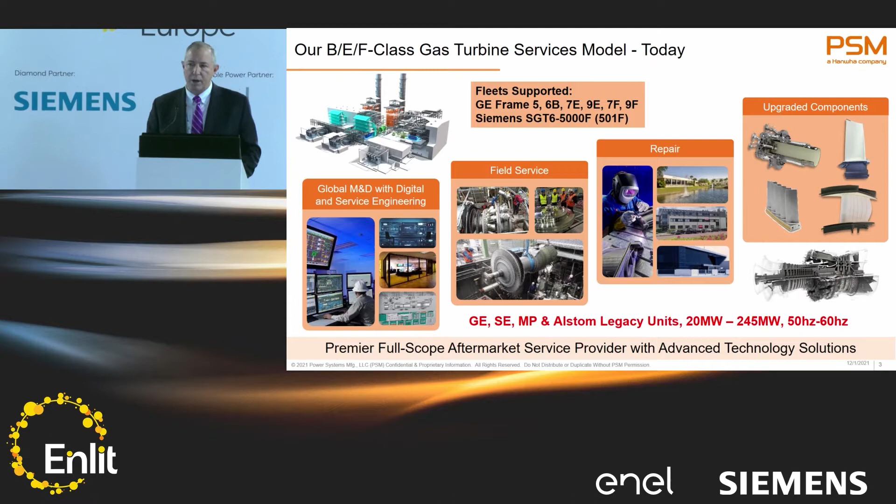In terms of footprint, I wanted to mention that we have 2 technology competence centers. One is in Jupiter, Florida, where PSM is located. The other is in Rheden, Netherlands, where our sister company Thomassen is currently operating. We share the same common R&D, the same technology and product solution DNA, just executed out of different organizations throughout the world.

Now, Torsten brought this up a little bit relative to the hydrogen supply chain. And I will tell you this, I do not view the barrier being in the gas turbine. It's simply a matter of time before we're able to get to a 100% hydrogen dry retrofit solution for installed base gas turbines. The issue is clearly on the upstream.

I think we've got a good handle on the renewable side, from a green hydrogen standpoint, the renewable aspects, that's coming along very nicely. But certainly when it comes to the amount of hydrogen one needs to make an impactful reduction in CO2, the challenge is somewhere in the middle. That is the cost and scale and installation capacity for things such as electrolyzers, even steam methane reformation if one is talking about carbon capture and sequestration, and then storage. Storage can be liquefied, it can be compressed, it can be geologic storage under compression, all of which will be able to support the decarbonization of gas turbines.

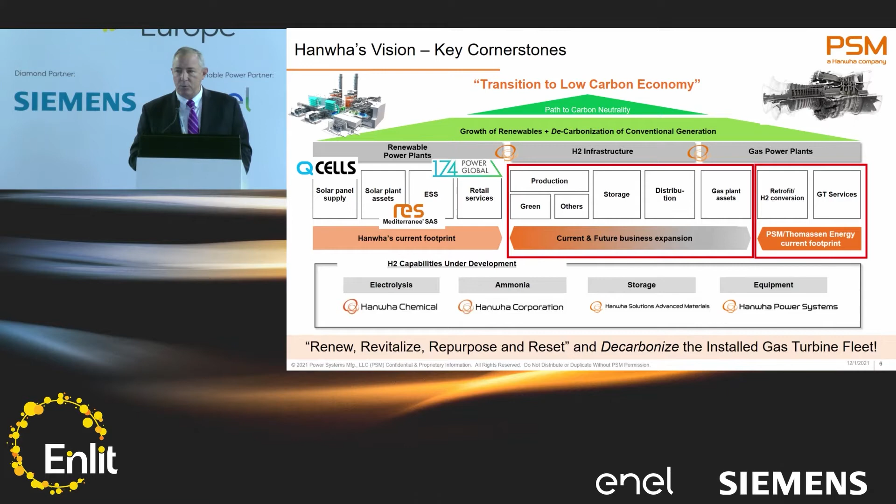So we try to make it as simple as possible for the power plant operator, who may not recognize how challenging it is or where they're going to get the hydrogen, but make it as simple as possible to just bring it to the power plant yard, and then we handle it from there and commission the system from there.

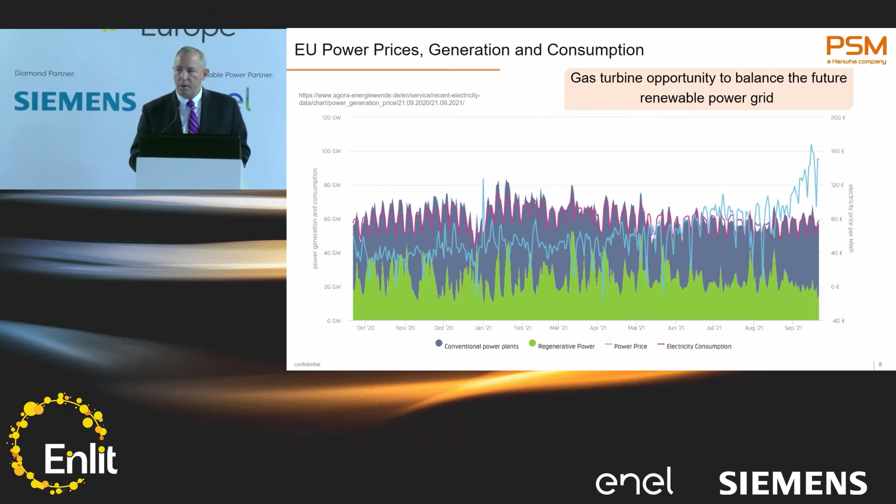Not just natural gas, but now with hydrogen, because the mechanisms for subsidies and also premium for carbon sequestration or carbon reduction will be there. So the business case is beginning to form. It's providing some solidity to those of you who are looking to make decisions within the next few years.

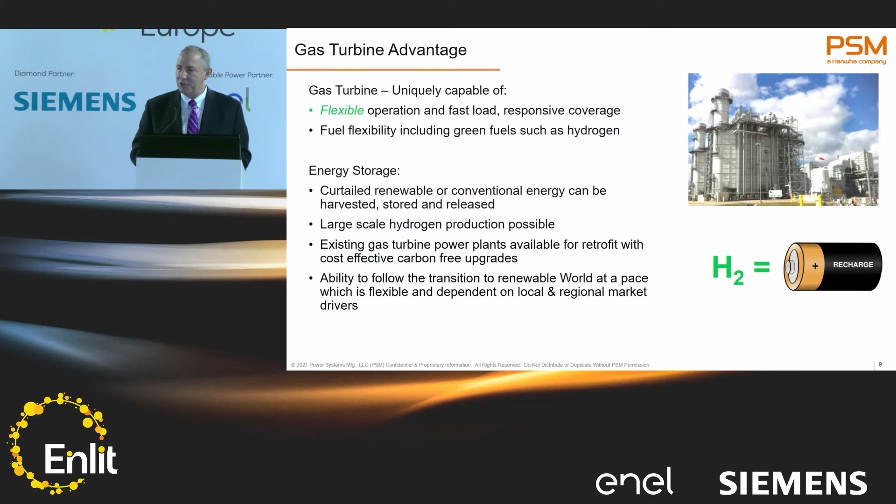So the gas turbine becomes just a tremendous, flexible, responsive device, and hydrogen becomes a measure of energy storage to be released into the power grid for those gas turbines to use. Very important when the wind stops blowing and it's very cloudy days. I think we've had issues where the wind stopped in the North Sea for a few days and the power prices began to spike.

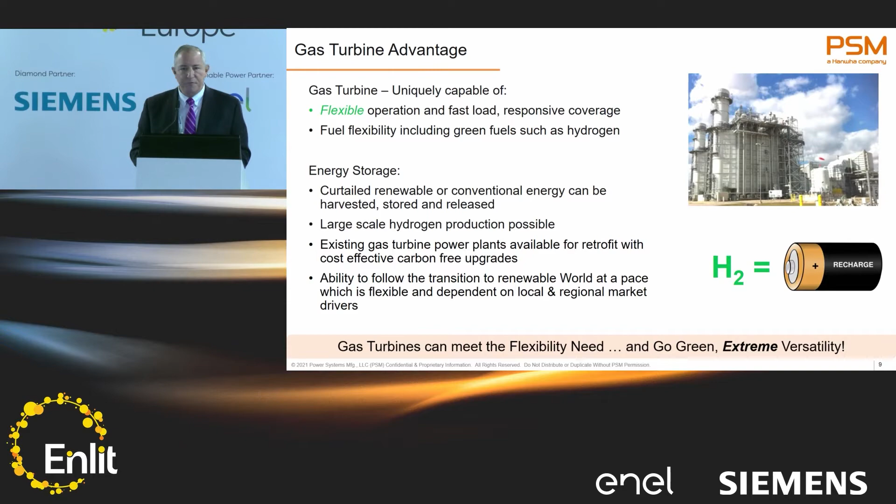Well, just now imagine you're in a situation where you don't have to worry about that. Just use the existing gas turbines. You'll get paid for decarbonizing, and it will be a useful asset for as long as you need it, whether it's 5 years, 10 years, or 20 years. You all have different timelines between either buying new equipment or retiring it. Well, a retrofit solution gives you that flexibility to meet your business case.

Now, one of our core competencies is combustion retrofits. We've been doing it for over 20 years now. We've been doing it on B and E class, let's call them relatively mature gas turbines, as well as F class, which I would argue today, since they've been out there for almost 30 years or so, they're also mature. But we've installed over 100 retrofits.

And this isn't just a replace in kind from an OEM solution. It can be an old diffusion combustion technology where not only are we replacing the combustors, but we're implementing a new control system, the fuel skid, fuel delivery piping. It can be casings, it can be spark plugs, flame detectors. The entire scope is something that we do, and we have two platforms.

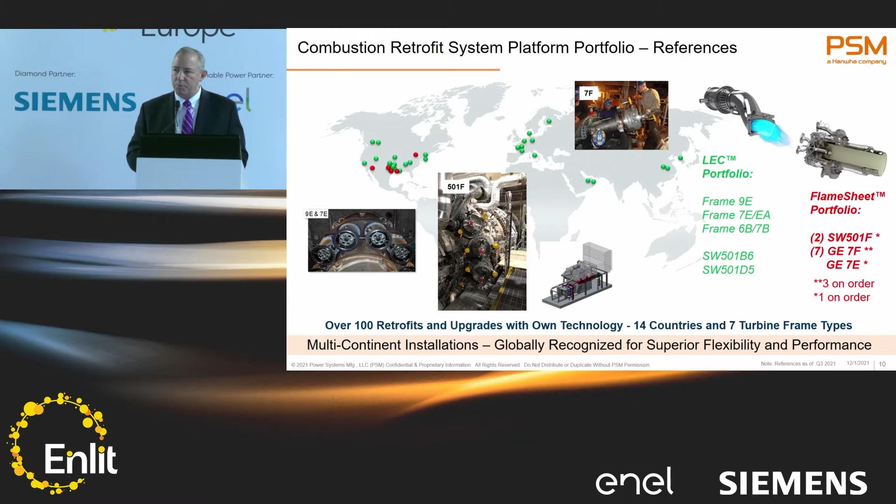One's called the LEC platform, which is more for the smaller, let's call it below 120 megawatt solutions. And then we have our FlameSheet technology, which I'll introduce to you today, which is our universal platform for all can-annular combustion gas turbines that are out there today. One platform, geometrically scalable, up to 100% hydrogen, but maintaining all of the characteristics you require in your gas turbine, such as flexibility, turn down, very low emissions, because it has the ability to consume anywhere between 100% natural gas and 100% hydrogen. Now I wanted to just speak to an example

of an existing retrofitted plant today with our technology. This is in the Netherlands. And one of the first, and say, quick hit successes is with refinery off-gas. Typically that's going to be with a high amount of hydrogen. Well, that's the case here.

This is a 3x9E cogen power plant that's not only supplying power to the grid, but right next door, this is in Terneuzen, Netherlands, is a chemical plant which requires the steam from this cogeneration plant for chemical processing. In turn, they're giving hydrogen back to the gas turbine to offset fuel costs.

They're owned by the same chemical plant, or chemical company, and also decarbonizing the gas turbine at the same time. The scope, again, is relatively straightforward. The modification to the fuel skid, the fire protections, explosion controls, the leak detection, the ventilation, very straightforward, well-known implementation of this technology.

A slight adaptation to the control system with a product we call Combustion Auto Tune, which will be able to instantaneously tell the variation between hydrogen and natural gas in your fuel stream.

So don't think of it as what is currently being used, gas chromatographs, which are relatively slow. We want you to have any sort of instantaneous change in your hydrogen fuel delivery from 0 up to the amount that the combustion would be able to take, and be able to modulate the fuel splits in that combustor to allow you to operate safely, maintain your emissions, and keep the combustion pulsations under control.

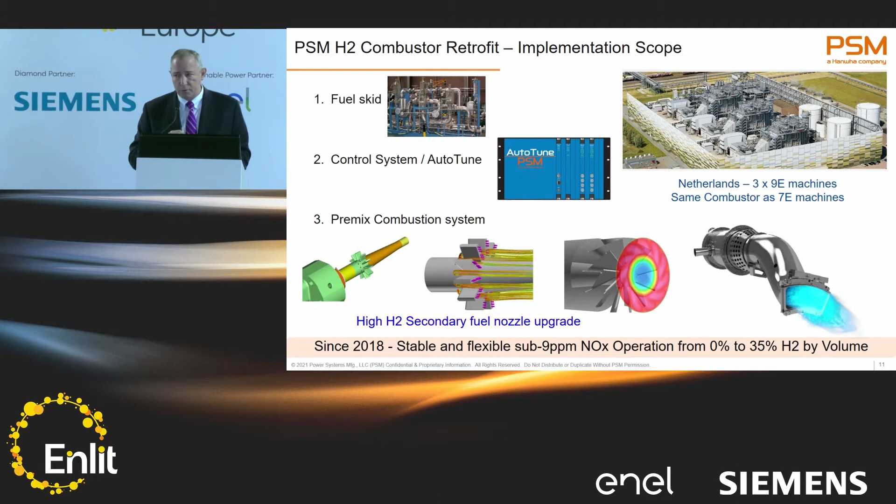In this particular case, we currently allow the unit to run up to 25% hydrogen by volume. This is at their request. We tested it to 35% without a problem, with sub 9 ppm NOx emissions across the entire operating load range. We don't view NOx as a real big barrier here, and we do not expect, and will not have, water injection as a means to lower the NOx. And it won't be in the SCR, it'll be directly and organically from the combustor.

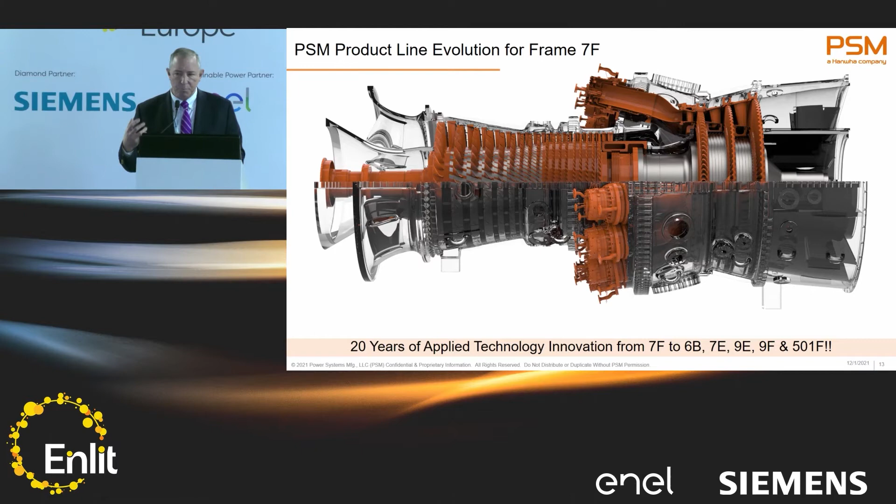This is a cross-section of the 7F, but not only is it combustion technology, it's also the fact that over the past 20 years, under these 4 owners, and Ansaldo was our previous owner, we've been able to develop our own replacement components using our developed technology that brings something different than you would expect or naturally get from an OEM. So we went after the weakest link, and as these gas turbines now have moved from a half-life of, say, 15 years to a half-life of 30 years, you're always looking for that next weakest link.

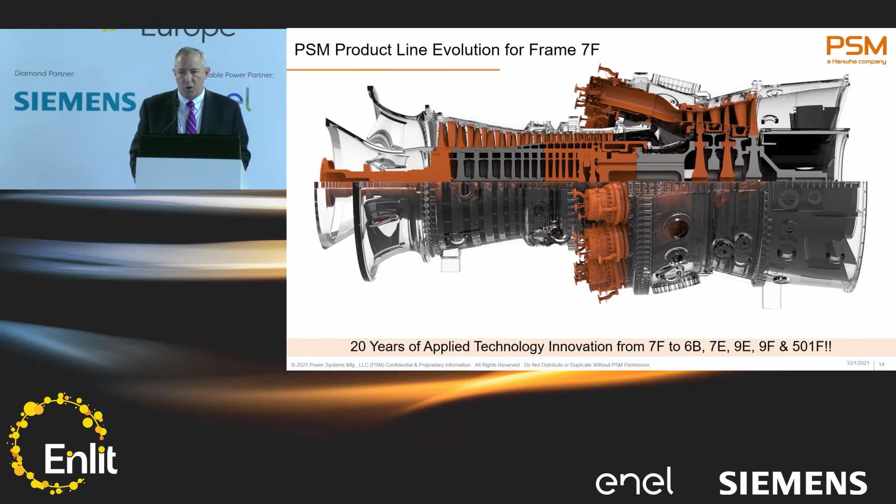And you're always looking for something to be able to keep those assets running profitably. And that's what we've done, not only from the flow path, but also being able to deliver our own discs, our own compressor wheels, and something we're really proud of, in 2022 we'll be delivering our first nickel-based superalloy stage 1 turbine rotor for a 7F gas turbine. So again, of our own design, recognizing what the challenges and the issues were in the OEM solution today.

Now getting to the combustor itself, the FlameSheet combustor, I call it multi-OEM, and I think I'm understating it in that respect. But it's very fuel flexible, it's dry, there's no diluents here, it's dual fuel capable. So in the instance where you may not have natural gas in your power plant, or your local regulatory jurisdiction requires you to have liquid as a backup, this also has a liquid fuel system as well. So when you're curtailed with natural gas and/or hydrogen, you can run for a number of hours, or as long as you have fuel oil at the power plant, you can run it that way.

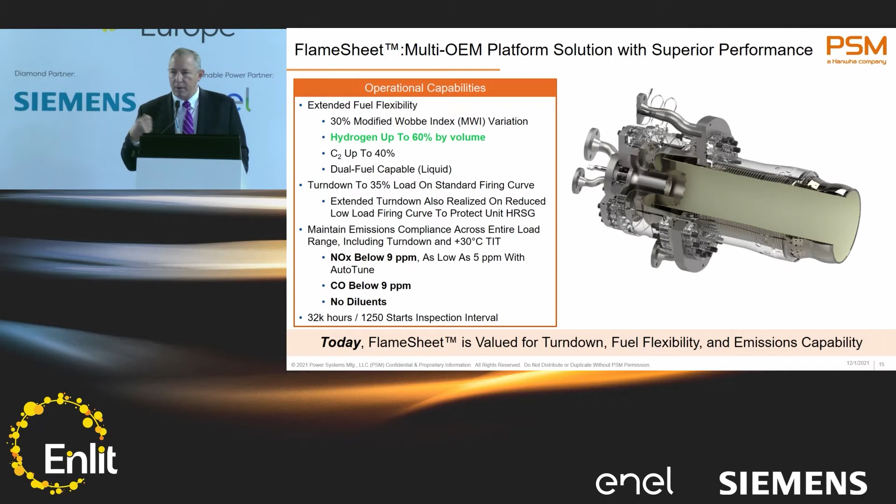But again, look at the NOx emissions here for natural gas. I'll talk a little bit about it with hydrogen, but this is the platform first developed and currently implemented for the tremendous incremental step change in turn down, which is very highly valued in certain markets, and then with the low emissions, as well as from a life cycle standpoint, going up to 4 years of continuous operation without taking an inspection.

We also use DLR, the German aerospace facility in Cologne, Germany, just as my colleague from Ansaldo, they do their testing there. One of the things you don't want to do is, when you're doing combustion, you don't want to burn up and use your customer's gas turbine as a test vehicle. You want to be able to do all the destruction to push those designs in a controlled environment with the types of fuels at engine condition.

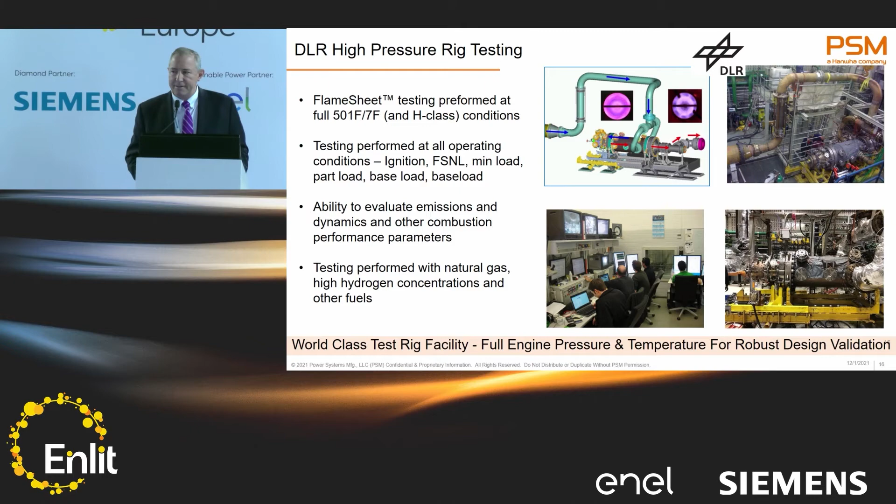And this is where we have our own test rig, which you can see on the top left, the top right, and the bottom right, where we fully test this combustion platform, including hydrogen.

The other element I wanted to talk about is combustion AutoTune. This is a really nice product. If you think of a field of wheat, typically when a farmer harvests it, there's always extra wheat left over, whether it's in the corner of the field, just too hard to get with the current technology. That's what AutoTune does for you. It allows you to hot rod your gas turbine and find those areas of wheat. In this case, this is additional profit.

And operate safely. It allows you to, in a controlled way, accelerate, modify your startups, and it can also extend your operational range.

We have this system in over 100 gas turbines. Today, we're selling about 10 or 15 of these per year, and it really is part of the hydrogen retrofit and part of our combustion implementation, but a simple addition to the existing control system. I am not going to force any power plant operator to change their gas turbine controller. It is not a requirement unless you have model-based control. And if you have it, you know it, and I feel sorry for you. But for those 99% that don't, we can operate on that native control system, whether it's from GE, Siemens, or Mitsubishi.

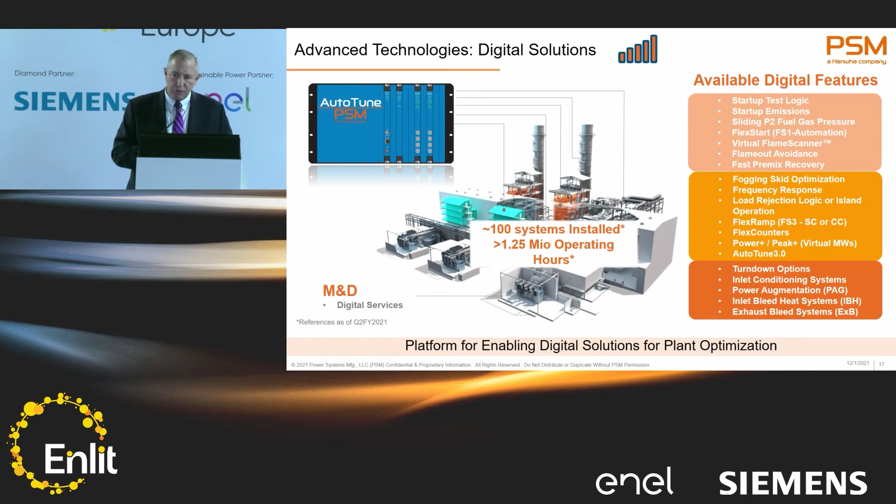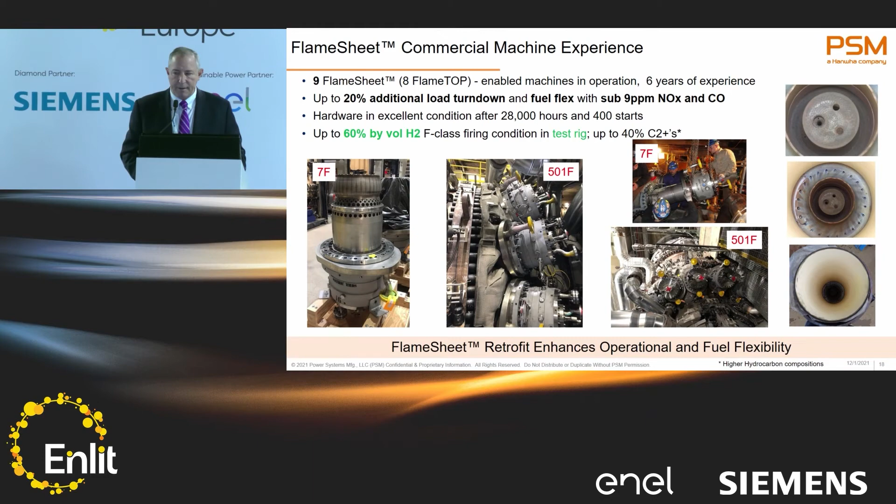Experience on this FlameSheet platform - we have 9 of these operating today. One of them with hydrogen, up to 5% hydrogen, but it's refinery off gas, and that's all that the hydrogen delivery system was allowed to deliver because it was delivering the hydrogen for an OEM solution, which could only take up to 5%. But this system is very modular, it drops right in. It can be retrofitted in the same inspection interval as a hot gas path, so in a matter of a couple of weeks during routine maintenance. Our experience to date has been just superlative. The hardware comes out looking excellent. In many cases, the operator wants to put it back in because it looks relatively unscathed, recognizing you have combustion inside the system as well.

The one thing I wanted to mention here - if you look at these 6 different types of gas turbines from 3 different OEMs, what you're looking at is the same combustion system. It's almost universal, and in this particular case, it's universal and it's the same geometry. So imagine if you had some type of portfolio of this and you wanted to reduce your inventory, and you wanted to have excellent flexibility, turn down, lower emissions, hydrogen capability. You're starting that journey where everyone is being asked to do it today and do it now, but it'll be a couple of years to get there. But future-proof your asset and repurpose it is what you're doing. And imagine only being able to do that with one platform, minimizing inventory across these various OEM platforms. A very powerful solution.

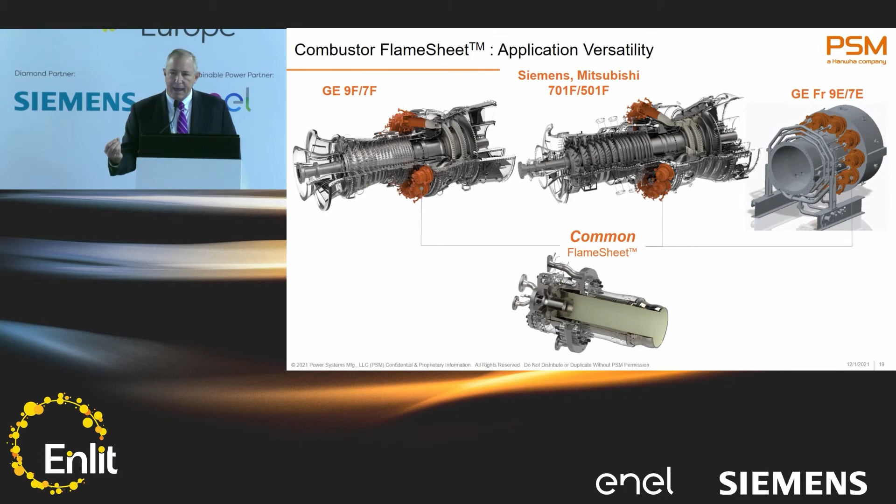We're finding customers are beginning to respond very excitedly about this, because in many cases here in Europe with 9Es or 9Fs or 701Fs, they see that this is a way to reduce their operating costs, which is another key thing we're trying to do.

Now, some really important, exciting announcements this year. We are going to be putting in the flame sheet combustor into a 7F gas turbine for JERA in the United States. This is a power plant that is sitting aside a petrochemical plant, a Phillips 66 petrochemical plant. They will be providing JERA the refinery off gas. It's not just hydrogen - it'll be up to 40% hydrogen, but it will also have ethane and propanes.

So we are developing today the fuel delivery system for the refinery off gas. We'll be implementing a backup liquid fuel system, and we'll be guaranteeing below 9 ppm NOx emissions across the load range, up to 40% hydrogen. This will be done by the end of next year, and it will allow JERA to begin to achieve their decarbonization strategy, where they'll be able to reduce this particular power plant's CO2 signature by 10%.

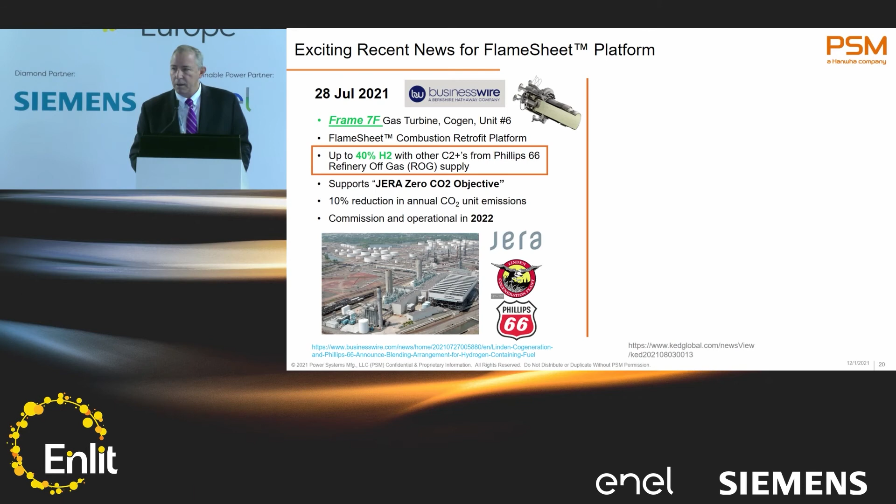That's quite a bit, since this is operating year-round, and this gas turbine is generating about 90 metric tons of CO2 per hour. So very impactful for them. It's a real win-win for the operators there.

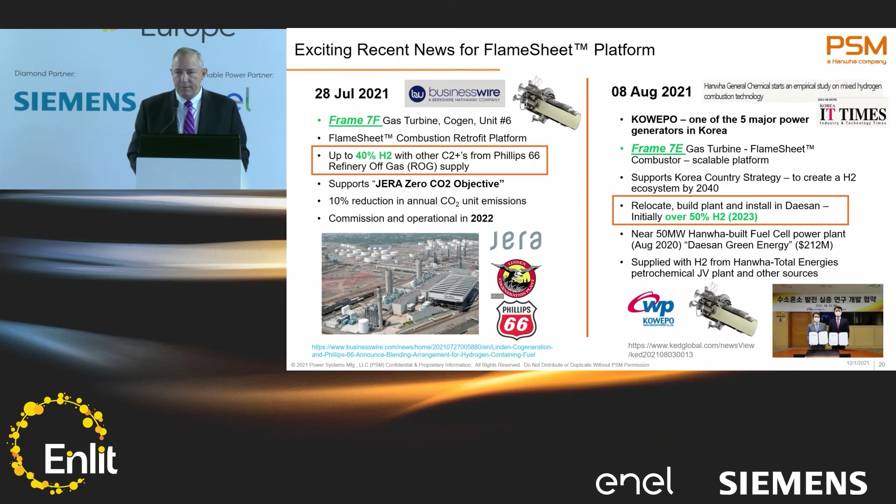Speaking about the modularity and universality of this flame sheet combustor, we will also, with our parent company, be implementing it into a 7E gas turbine by the end of 2023. This will also be beside a refinery off gas. The issue is, where do you get your hydrogen? The quick hits and easy hits today for those supporting oil and gas are with refinery off gas, and in this particular case, they'll be able to deliver over 50% hydrogen.

So the question becomes, how far can this platform go? I want to stress we're talking about dry, low-emissions combustion. We're talking about retrofits, a delivery of a system that's part of a larger hydrogen ecosystem. Today, in an F-class combustor, the flame sheet platform can operate up to 60% hydrogen by volume. The 40% limit in our previous JERA example was from the refinery process. Where our technology roadmap takes us today, there's only so much we can do with our LEC platform, but that's okay. The objective isn't necessarily to get to 100% all the time; it's to put the right solution into the asset you may have.

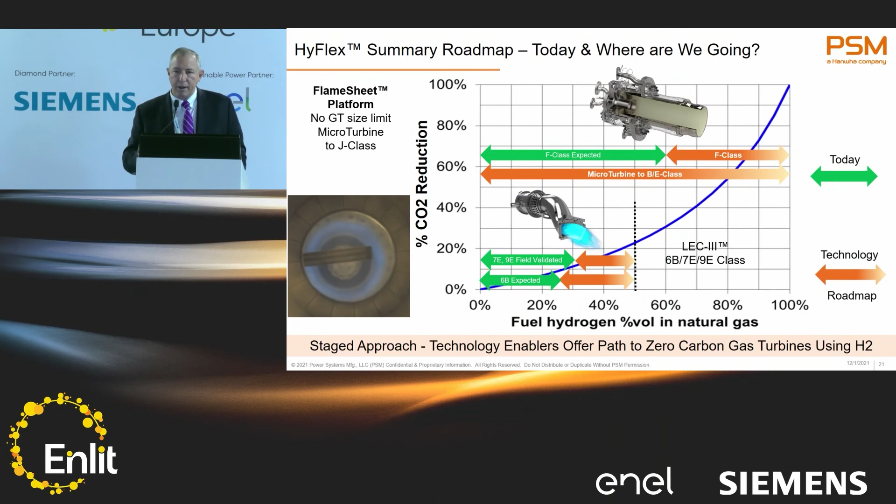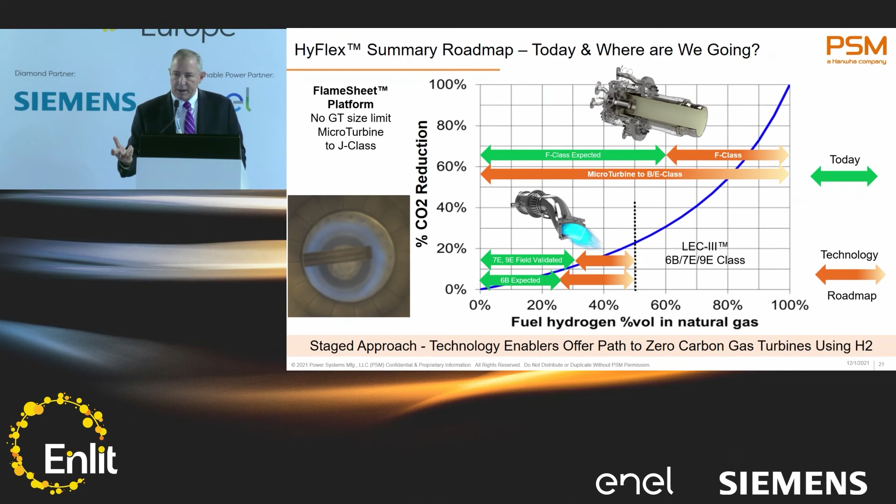But we are working on our roadmap, which will be 100% hydrogen capable well before 2030. So when I say I don't view the technology required to get to 100% as the limitation of the gas turbine, it's really not. The technology is there, it's available. We want to put you and the power plant operators on that pathway to decarbonization.

So why do I feel so confident? Well, we do the testing at DLR. We have a large consortium of collaborative partners based not only in the Netherlands but across the EU. We're taking the universality of this flame sheet and scaling it down to test it on a microturbine, a 2 megawatt microturbine made by Opra Turbine out of Hengelo, Netherlands, proving to ourselves that we can geometrically scale this flame sheet, not just have one universal platform, but apply it to other gas turbines like Frame 5s or 6Bs, or in this case, can-annular microturbines.

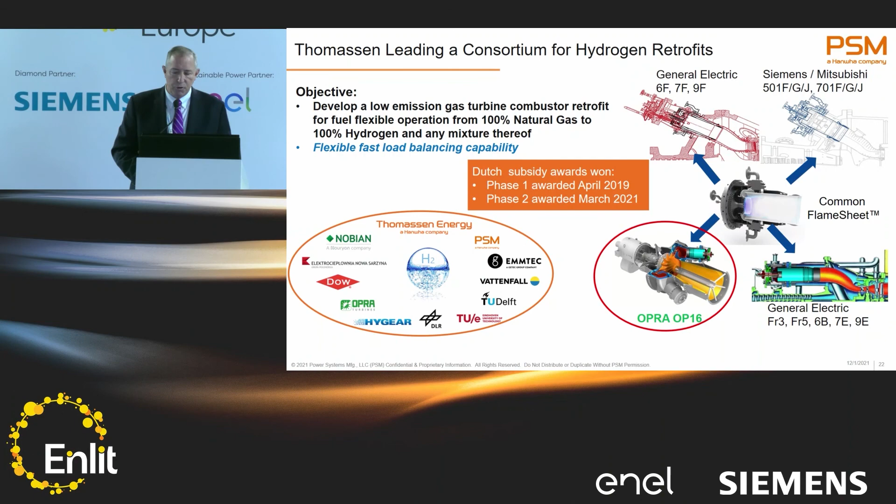What was really exciting is that within this year, we've proven to ourselves that we can achieve from 0 to 100% hydrogen in this smaller flame sheet combustor with NOx emissions in just about single digits, a little higher than 9 but lower than 10, at the operating and flame temperature you would actually have for the gas turbine.

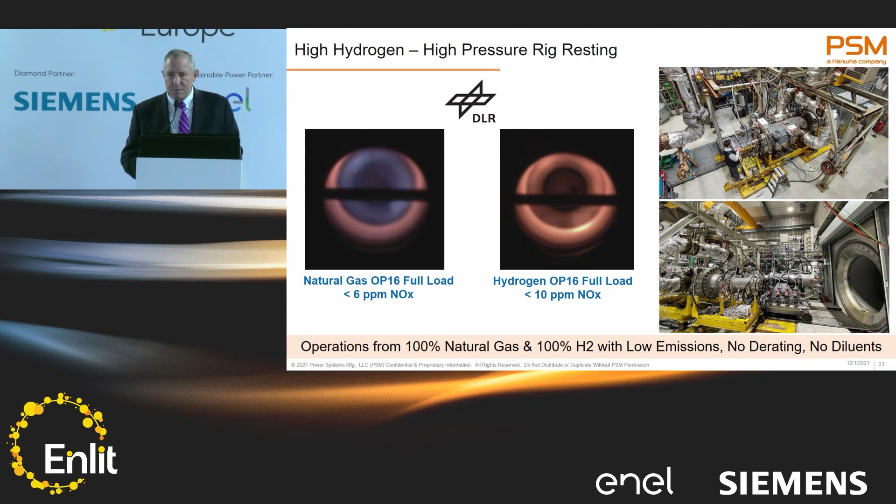NOx is an exponential function of flame temperature, so we're talking about the same type of energy required to go into the gas turbine, and we're doing it at DLR. So that's a bit of my wrap-up. You can see I'm a little excited about it, simply because everybody's clamoring for solutions today.

Most people aren't in the market for new gas turbines. They simply want to use the assets they currently have. We see the supply chain and where we can help in it, but we partner with manufacturers for electrolyzers, compression, and storage, and can bring the whole solution if we want to. We're very excited to be a first mover in the commercial market. We only see more of it coming and accelerating.

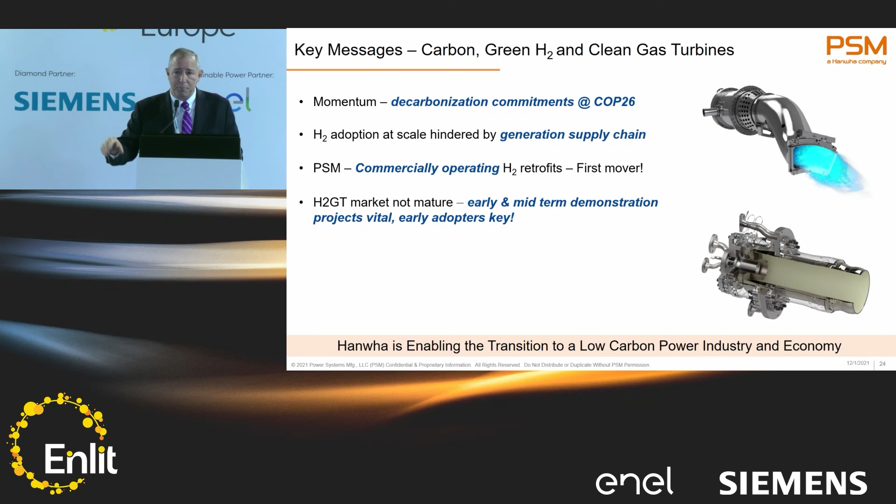Just as everyone talked negatively about renewables 20, 25 years ago—that the turbines looked ugly, were very expensive, impacted migratory routes, and people didn't want to see them from their backyard—it's the same discussions with hydrogen today around cost. All those barriers are coming down today.

We view the gas turbine as the ultimate flexible and compatible energy conversion device for a volatile, renewable-dominated grid. Hanwha is working aggressively across the hydrogen chain, and think about this: we want to help you renew, repurpose, and repower the installed base of gas turbines. There are thousands of them out there. Let's just provide the technology to support it today. So that's my speech. Thank you very much.